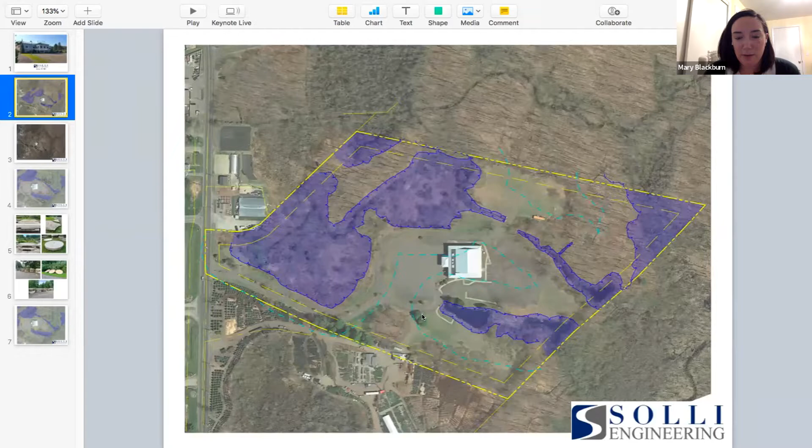This is the original aerial that we presented, and I know there were comments about getting an updated aerial. This was the most updated one I could find. It shows some outdoor storage happening in the paved areas, some additional current outdoor storage in the meadow, which we saw on the site walk, and some in the lawn area and parking area out front, as discussed at the last meeting.

The new revised submission captures all of that, and anything not in these new proposed areas will be moved into the proposed areas. I tried to simplify the plans here—everything in the pink dotted line is the proposed outdoor storage that's been revised and reduced from the previous submission.

Previously we were proposing 152,308 square feet. This plan now proposes 80,056 square feet of outdoor storage.

We reduced it based on where the existing tree line is in this area. The tree line's out here, but it's a little bit further in, and in the southern portion here we brought it in to more closely follow the tree line. Previously it came out to the building setback here and was millings. This area had a whole secondary storage area proposed in the woods that's been removed—it's no longer part of the proposal.

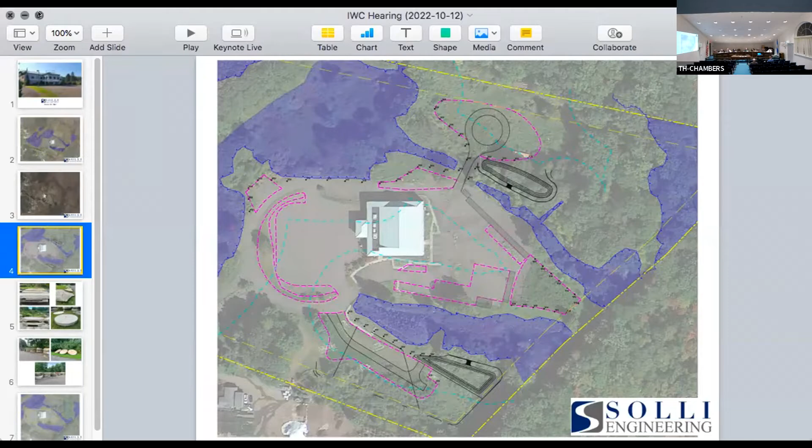Very good, thank you. We'll start down at the end of the bar. Commissioner Kelly, any questions? I don't think I have any questions right now. All right, Mr. Lindstrom? No questions at the time. Mr. Mastrocco? Mastroraco.

Mastrocco: We had finished - when Keith and I went and visited the site, it was a Saturday or Sunday, we ended the walkthrough at the bottom part of the plan there. Before that, we were at the back of that parking lot, talking about where that light pole was and possibly removed. Remember where we were standing at the end of that parking lot?

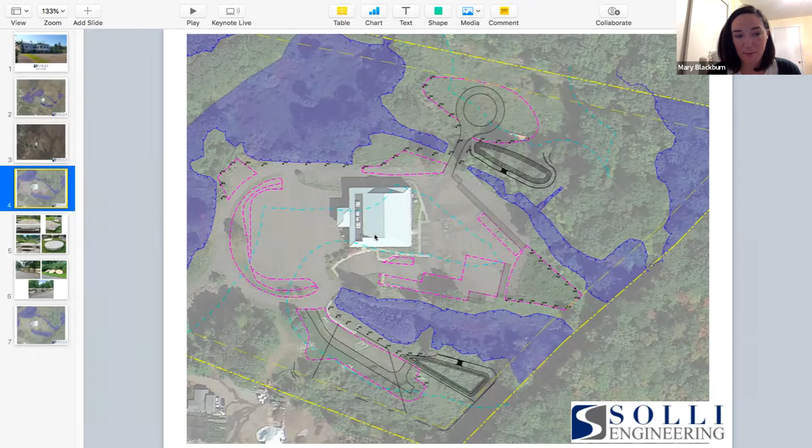So there is a light pole. We didn't go back into this area because there's brush, but there was a light pole foundation that was removed in this area, and then there were two light pole foundations in this area that were removed. Those were there when the church was using the building or owned the building.

So when we were standing like in the back of the building, we were at the back of the asphalt parking lot - that's about where we were? Yeah. So that whole area, you guys are thinking of getting rid of all those weeds that are in that back area and using that as storage, is that correct? Yeah, and that would be the road base, the 6 inches of process, back in this area.

No more questions. Okay, Commissioner Romano?

Mary, on that picture, can you zoom in? Or is that just a fixed photo? Just to the area that Ross was just talking about, the part where Ross was just talking about. There we go, is that - as close as you can get - if we can do it.

So do we feel like that area was previously processed out, like had road base in it? Or is it topsoil-y and stuff where it's not going to be structurally sound? Yeah, as we saw, it was vegetated. When we were out there, there was a pole base.

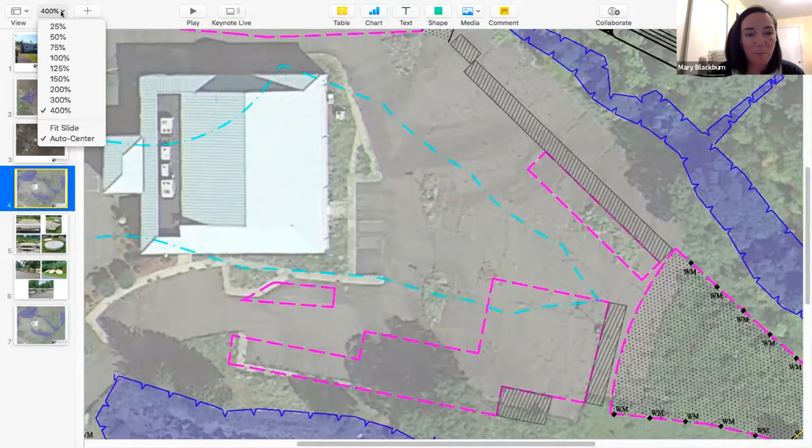Okay, so why not use that whole meadow? Why are you giving us a purple line that's shortening it, when that's already been kind of used? This is the existing tree line, and it follows it on this side where - even if we leave this as meadow and we're storing materials on it, it would increase the impervious area.

That becomes an issue - it's too much then? We're being conservative and assuming that, and so that's why we're providing a basin to capture that runoff. So you can't go to the tree line? You can't go to the tree line to there?

Is that the light blue line? No, the tree - that's the wetland setback, I think. No, that's the wetland setback, but the tree line kind of roughly follows it.

Yeah, I mean, we could increase it. We were just trying to reduce it based on your - well, as long as you have the water treatment capacity, because that pond hasn't changed in size, right? Right, yes, we didn't reduce it.

We're just - why not? That area's already got stuff in it. It's already flattened out, it's probably firm. I don't see why you wouldn't capture that extra, whatever it is, eighth of an acre, whatever it is.

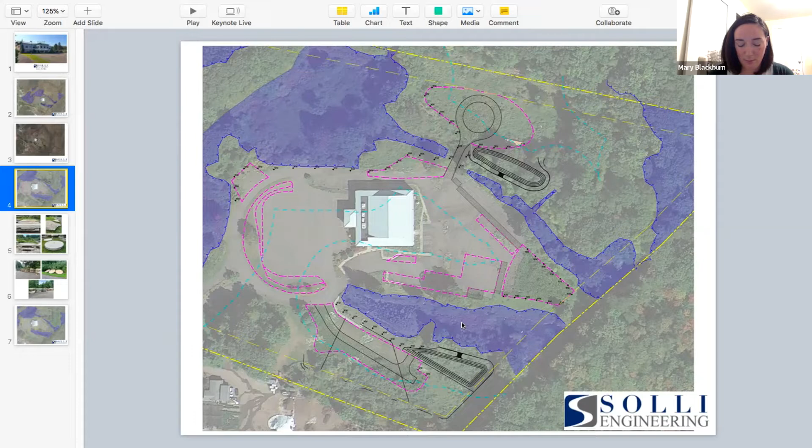No more questions. Okay, I think, well, let me ask this.

Are you interested in expanding that area at the top, in here? Yes. Yes, I think he would be interested in that.

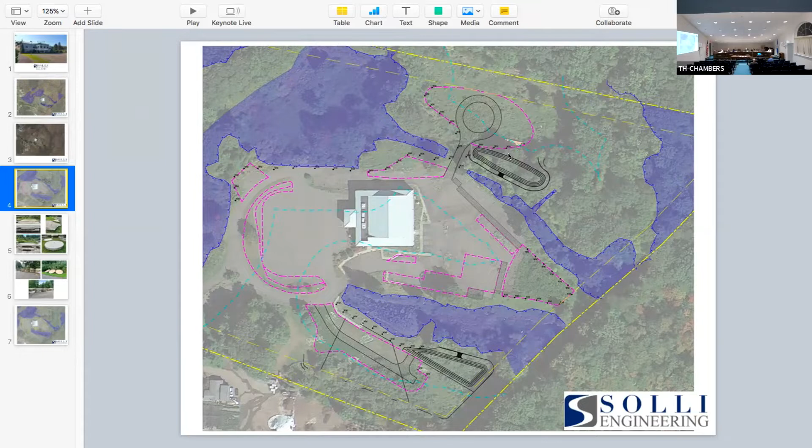If that's the case, and you want to review and respond to the engineer's comments, I think we need to hold this over one more time. Our questions have pretty well been answered. So I see no reason to try to bring this to a conclusion.

You know, the full round of public participation. Well, you said anybody probably is pro, for the general nature. Oh, I see, pro against. There's no one here, but I'm just saying. Okay, yeah, I think anybody had a chance.

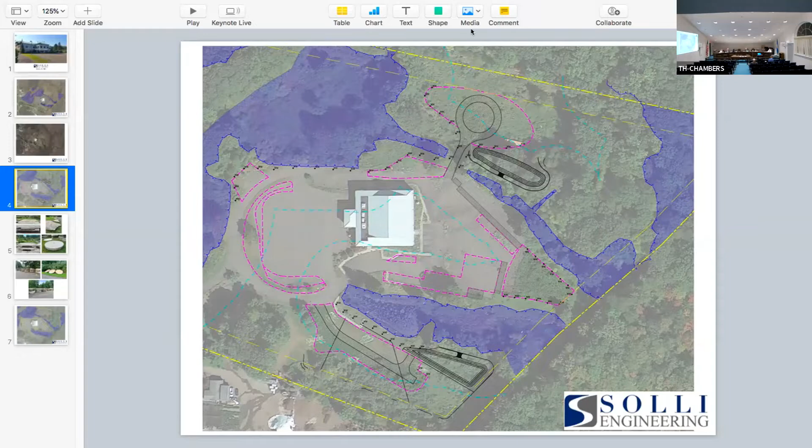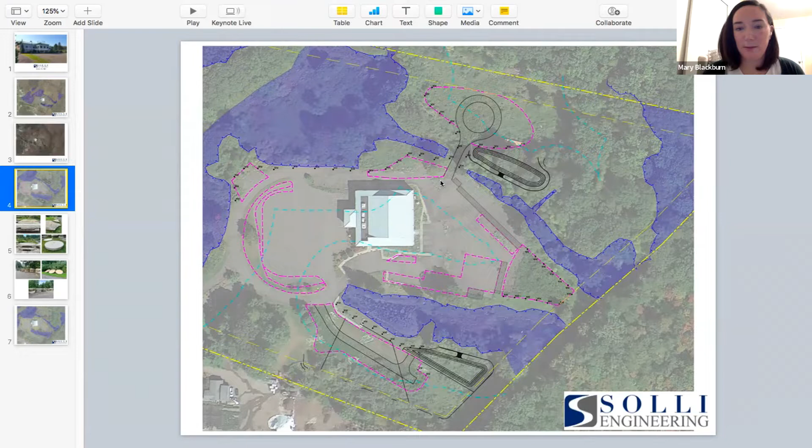Right, so let's put this online. We are going to be meeting on the 26th to hear more on Turkey Roost Road. So if you want to have that ready for our next meeting in two weeks, does that work? Yeah, okay, so we'll get that in as soon as we can. Very good, this is continued till the next meeting. Thank you.

IWC 2022-13, 141 and 201 Turkey Roost Road. Construction of 90 single-family detached dwellings served by 5,570 linear feet of new roadway. This is continued from 9/14.

Do you have some items to enter into the record? Yes, Mr. Chairman, really the purpose of tonight is to state the two exhibits I'm referring to for the record. First is the 65-day extension the commission requested for, which they acknowledged at the last meeting. We have received that letter of authorization. The next document is from the Southwest Conservation District.

They have provided a document dated October 11th, addressed to the chairman. It's many pages long, and essentially they are recommending that this commission proceed with hiring a consultant, which you made that determination at the opening of the hearing, and that they will be assisting the commission as they have in the past. All the members have a copy of the Southwest Conservation District document, and it's also posted on the town website, so anyone desiring to read it, it's quite informational. As far as the consultant, under general discussion later, we will cover that matter. That is all for tonight on that item.

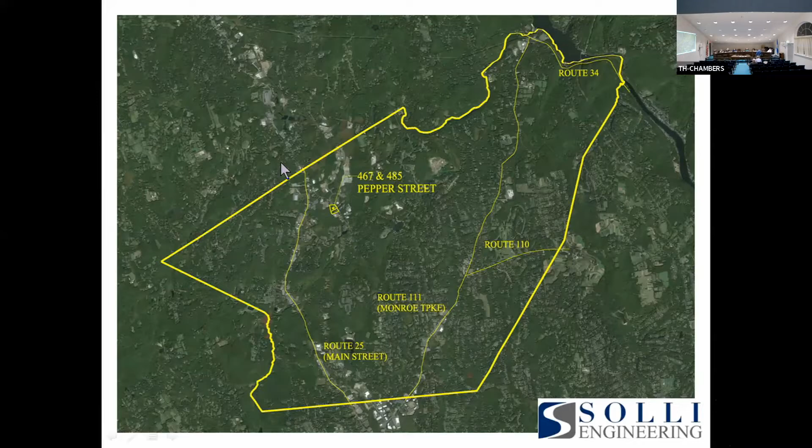Zooming in here, you see the two properties, 467 and 485 Pepper. This is an aerial from 2018. I apologize I don't have a newer one, but I wanted to give some history on the project. Back in 2017, 2018, this commission approved the permit for 485 Pepper, the larger piece to the north. That permit was for a materials yard, a construction yard, with an enclosed processing facility. A bulk building permit was issued, it was constructed, it is operational. Our client is also the road contractor for 485 Pepper with the town, so they've been using the yard as a staging area and also doing the road work out of the site.

Can you clarify constructed? Because I never saw a building there. Correct, so the building has not been completed, but the site is, I guess, under construction would be a better term. They have cleared it out, they have moved their equipment there, they constructed the retaining wall in the back, which I'll get into in a minute, and things of that nature. But you're correct, they have not constructed the building yet.

The reason for that is as they were laying out the site, they realized they were fairly constrained, and our client then went ahead and purchased the property to the south, 467 Pepper, which is the more rectangular shape. Also about two years ago, maybe a year and a half ago, there was a violation issued for the site. While they were constructing the retaining wall, some silt had washed into the wetlands.

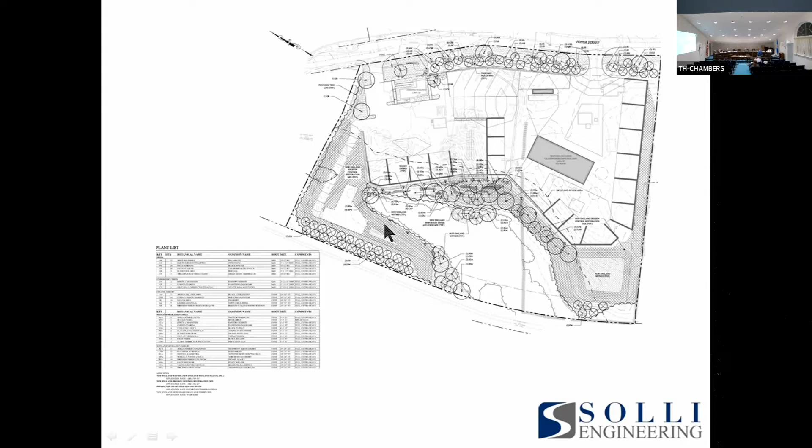And with that, I would like to open it up for any questions that you guys may have.

Okay, why don't we start on the Zoom? Commissioner Gingrich, do you have any questions? No questions. Very good. Then we'll start down with Commissioner Kelly.

The proposed septic — is the intention not to construct that now, and you're just seeking approval at this point, or do you intend to build it? There is an existing septic located out there; the office was an existing residence on the prior approval and was converted to an office, with an existing septic system already out there. We're going to be upgrading it and bringing it up to capacity for the office use. So it hasn't been installed yet, but it is part of this application, located out by the street front here.

Yeah, this area — sorry, I apologize, it's hard to see. I can bring the plans up and zoom in if you'd like. You said that's where the existing septic is and that you'd just be upgrading it, I apologize, I missed that. No, so we will be installing it.

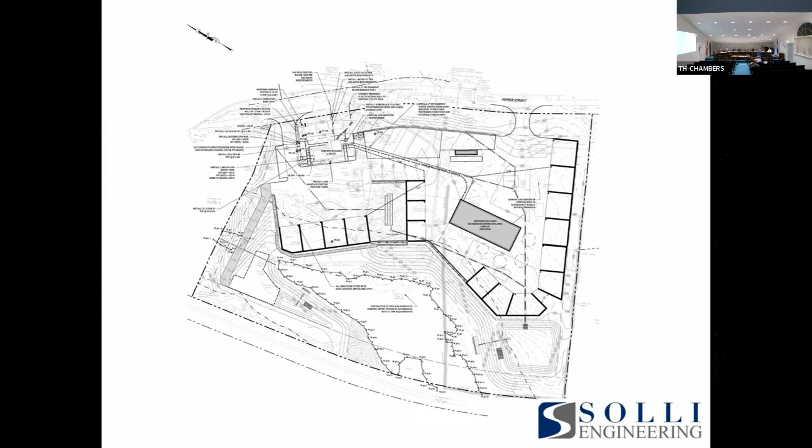Can you throw up the plan that shows the catch basins again? Or is that the one? That is this one here—I can zoom in, hang on one second.

So my question is, you have a back pitch to that area, so where that access is, does it get down to maintain the basin? Correct, you have a back pitch for that area going to that catch basin, so the stuff can't flow out that gate and into the...

So basically, I'm asking, is there a high point right there? This is a high point, that's the grade you see. It's gonna keep... Correct, this catch basin right here is low. So it goes, it's almost like you have to go up and then back down, if you will.

So everything is contained within this, and it's the same thing on this side. We have a high point here, and then this is higher up here, and this is paved, and then everything bowls, if you will, to the center here. So this point is low, this point is low. We have another low point here, and then another low point in the back. So everything is contained within the construction yard, if you will, so nothing is going to be escaping and running down the bins.

Now what happens with the bins? So the bins are all pitched out towards the catch basins, at 2%, yes. They're all, yeah, so like on this...

What about the import bin, the import material bin? The same thing, it's gonna be... so for example, these bins that you see on the screen right here, those are the finished product bins, and the import material bin - well, these will be the import bins. They're higher in the back and they're gonna come down this way. This is where the bigger square is, the import material, where the galleries are.

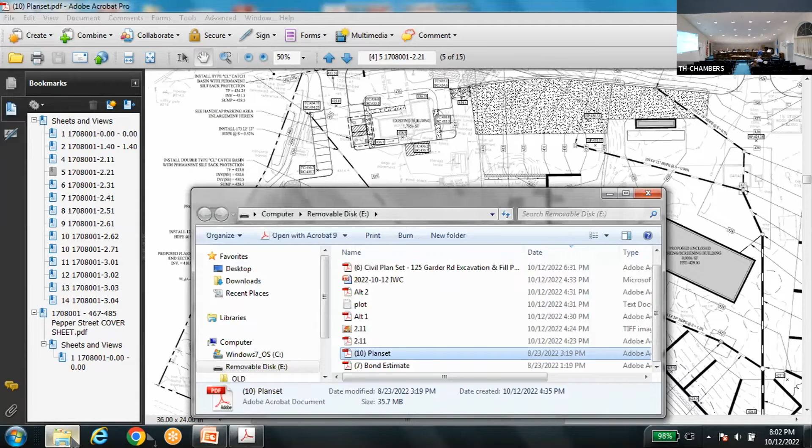But the plans I just showed you guys today would show this area. This path right here, which is existing, rolled asphalt millings at this point. Pretty steep, correct. They're using heavy loaders. My feeling on this is that that's one thing that maybe should not be acceptable.

One of the things we noticed on the site visit when we were in that specific area was that it is quite steep. The three of us out there, including Jim Stewart, Eric, and myself, felt it was better to keep it where it is today than the original plan to replace this wetland. So it is steep, but standard trucks wouldn't be going up and down that, just heavy equipment loaders. It is steep, but it's stabilized. It's also right there smack in the middle of all the wetlands.

So we are proposing Jersey barriers on this plan on the side so that there will only be a traveled path, if you will. Let me check with Mr. Schultz here - was keeping it on this path going to require a variance or approval from the engineer or P and Z?

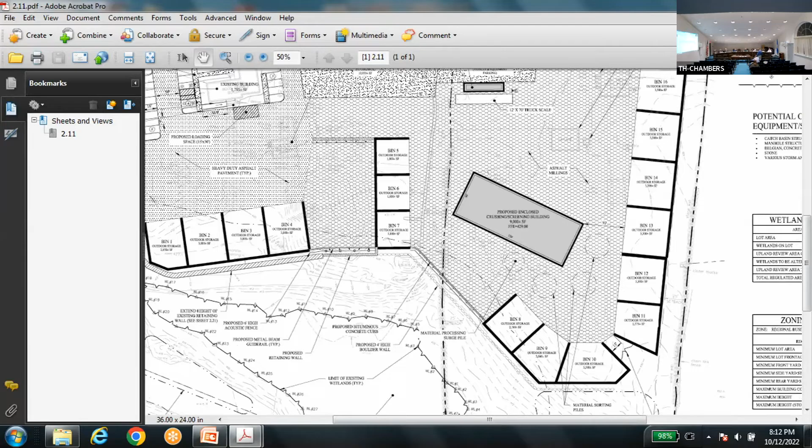There's a bunch of open questions now, like what's going to keep them from pushing those piles, or at least that one pile, by bin 8, into the catch basin right there? If these things are landing on the ground on those piles, and they come in with a loader trying to scoop it up from different sides, they're going to push it. What's going to protect that catch basin? So they're not going to be placing it right on top of the catch basin, not on top of it. What I'm trying to say is I understand guys want to scoop up the pile.

Here's the other question, because I think it all ties together as to how this property is going to be used and what possible problems they're going to have. If those are the actual piles, how do they load trucks taken out of bin 8, bin 9, 10, 11, 12, 13? So if there's some storage in bin 12 and now there's 2 conveyors coming out in piles right there, so I believe the trucks will be able to navigate around the building.

Can you identify yourself, please? I am, I'm going to do that.

For the record, my name is Robert Pryor, professional engineer, land surveyor with Solli Engineering. I'm letting Chris do most of the talking tonight because as you can hear, I'm not feeling too well. But I'm going to try to do a little bit of clarification on some of the operations, hopefully that will address some of the questions for you.

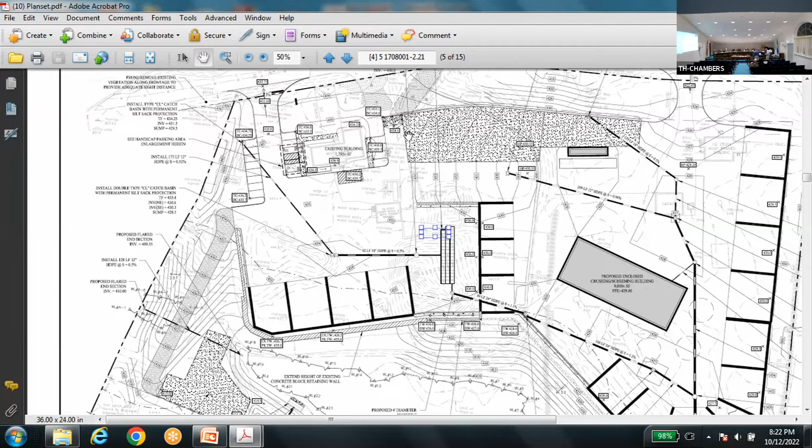I'd just like to point out that Scott's line will require us to provide access to this basin, so there may be a gate or something of that nature in this area so they can still access that stormwater basin. That'd be a very good suggestion. I appreciate it, thank you.

Something to keep the kids penned in.

Any other questions here for us tonight? So the commission is finished with their questions. We're open for public comment.

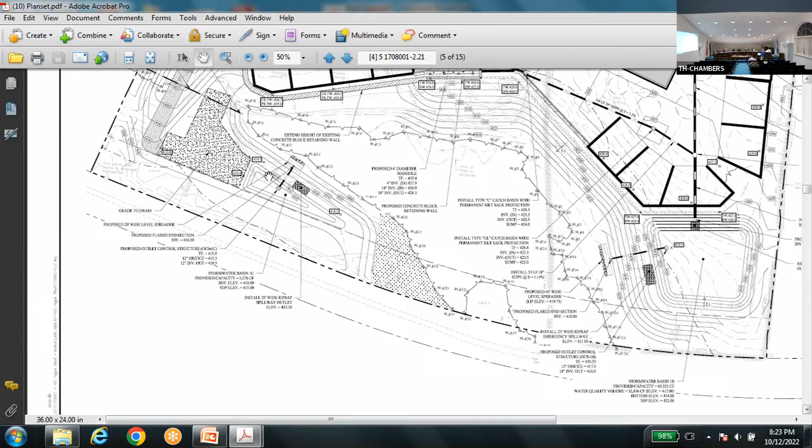Any comments, pro or remote? If you're remote, is everyone muted? You can see if there's any comments remote. Anyone locally pro? Anyone locally against? Anyone with comments of a general nature? No comments heard, I think we'll move on.

Thanks, Rick. So this is the site. Garder Road runs here, east-west. This area will be part of the work area, and the upland review area is this dashed line—you can barely see it, but it runs right across the site like this. Wetlands are located on the northern portion of the property right here, and we'll be disturbing the upland review area to construct this basin.

Level spreader. What's the total size of the property there? The property is about 9.5 acres, 1.45, I believe.

I drove by there today and there was active quarry work going on. I understand from Rick that there's been some cease and desist orders. That's correct. There was a large piece of machinery chipping away at the stone at the top end of the site.

Is this Casella's property? It's Grasso now—Grasso purchased it recently. That's the old name, yes. I apologize, I haven't been out there, so I can't speak to our client.

See if we could put an end to it. What's the proposed use? For now, we're just going for an excavation and fill permit, but the end use will be industrial in the future.

There was equipment stored up and over where my line of sight was, which to me put it back either against the wetlands or in the wetlands. And there were some very large piles. So I think I would consider this to be a disturbed site right now.

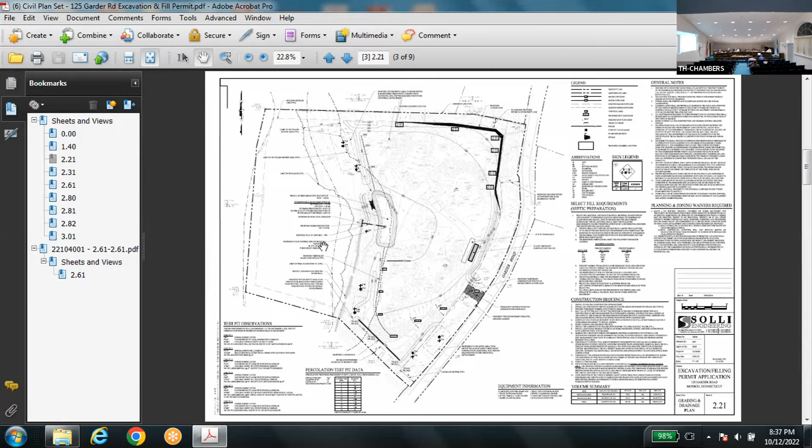I think given that this is a disturbed site—I have no idea what previous approvals were given for work on the site—but I think we need a public hearing, and we probably need to look at having analysis done on wetlands infringement, things like that. So I would ask for a motion for a public hearing.

Does it make sense to do a site visit before we make that determination, or do we need to make the determination before? We've kind of got a determination now—the applicant is asking—and then we'll schedule accordingly.

I'll motion for a public hearing. Is that a motion? Yes. Do we have a second? Second. Okay, all in favor? Aye. Okay, it's unanimous? Very good.